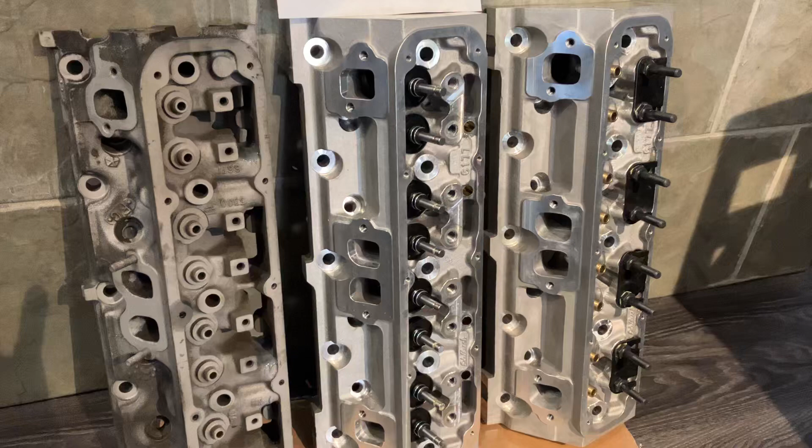All right, let's take a look at some small block Mopar offerings. On the left here, you've got a stock 5.9 Magnum head. In the center, you have an out-of-the-box Edelbrock Magnum head. I've removed the springs and the rocker studs, put some Dykem on it, but I haven't touched it with a grinder, altered the ports or the chambers or anything in any type of way yet.

And then on the right here we have the same head. Those two came together in a pair, and the one on the right is one that I've finished porting, and it's ready to go to the shop and get the valve job touched up, checked out, and then it's going to go on my engine. So we'll look at some hard numbers first. I did some measuring of the cross section of the intake ports, and I took some port opening measurements.

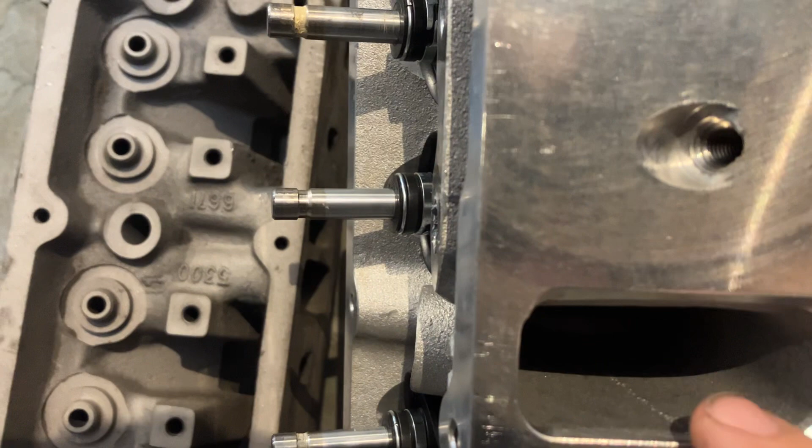So when I say port opening measurements, what I mean is the measurement that they give you here on your intake port on your window doesn't mean that that's going to be your usable area. There's your port opening. Edelbrock's going to give you this number. They're not going to give you the actual cross section, the usable section there in the push rod pinch where your port necks down. So I took measurements both ways. Let's take a look at that for starters. See where we're at here.

Okay, so the OEM is a 1.92 intake, 1.625 exhaust. The Edelbrocks, whether you buy the LA or the Magnum version, are a 2.02, 1.60. That's one thing I want to say here. There is a difference in heads between their LA and their Magnum version. They don't just have one casting that gets machined for different rocker arms. They've actually changed the chambers between the two heads, and that's something I'll touch on with Trick Flow as well. That's somewhat disappointing.

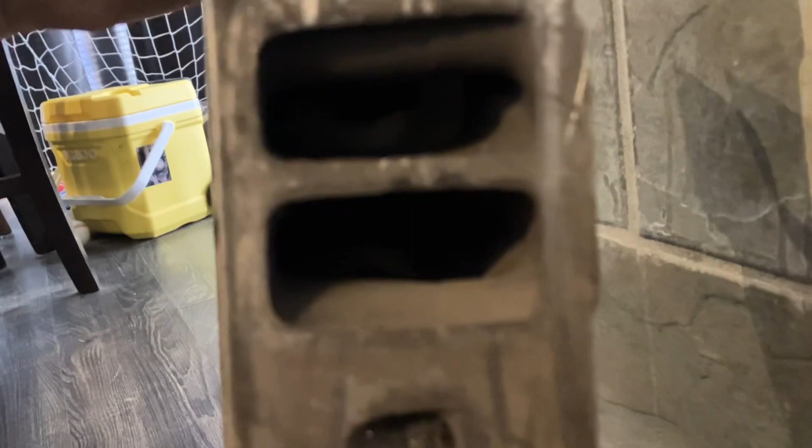So on your intake port on your OEM head, you can see how it shrinks there with that push rod pinch. So on your OEM head, you're 1.071 wide and 2.14 tall. Now that's your gasket measurement at the port. But after the horrible push rod pinch on small block Mopars, your usable measurement is only 0.824 wide. And interestingly, it grows when you get down in the pinch, when you get about a 1/4 inch inside the port.

The OEM head actually opens up. The floor goes down and the roof goes up, and it opens up, which is unusual. That opens up to a 2.271, and your cross section area is 1.87 inches of usable port. Cross section is a measurement of the amount of air you can flow through that area before it becomes a restriction. So what I mean by cross section, I'll touch on that down here.

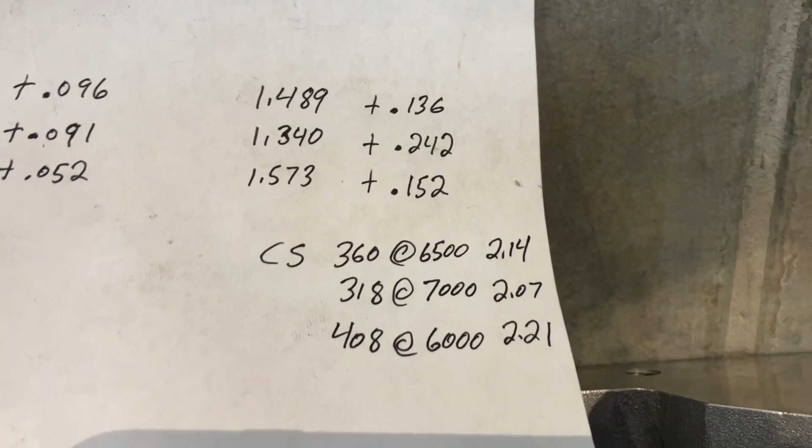Okay, a 360 cubic inch engine at 6,500 RPM needs a minimum of a 2.14 cross section in order for the port to not be a restriction. That doesn't mean that 360 won't spin 7,000, 7,500 RPM, but it means that beyond 6,500 RPM, if you don't have that minimum 2.14 cross section, then that port is going to become a restriction. And there's some numbers there: a 318 at 7,000 is 2.07, and a 408, a stroker small block Mopar, at 6,000 is 2.21. I'm working on a 408, that's why I put those numbers down.

So you look at your 1.87 cross section, and off the top of my head, I don't know, that'll take your 318 to 6,500. These Magnum motors never saw that kind of RPM, so what they designed in the OEM head was fine for the application. Interestingly, the out-of-the-box Edelbrock has a smaller cross-section. It measures a little bit wider at the pinch, but a little bit shorter in height. So out of the box, cross-section wise, it is smaller than an OEM head.

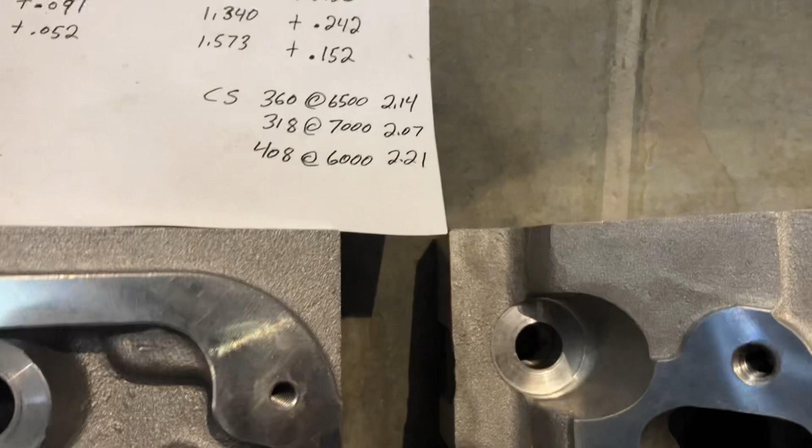And then I ended up with a 2.3 cross-section on my ported Edelbrock when I was done. I ended up at my pinch 1.028 wide and 2.24 tall. So I ended up with a 2.3 cross-section. That's going to support my 408. You know, I'm looking to shift about 6,200, 6,300. So that's going to support my 408.

The way I want you to think on cross-section is on a carburetor, on your typical 350 Chevy with a 650 carb. When you're wide open throttle and you watch your vacuum gauge, your manifold vacuum, you might have 12, 14 inches of vacuum at idle. When you go wide open throttle down the road, that vacuum should drop to near zero. Half of an inch of vacuum.

If your manifold vacuum at wide open throttle going down the road is over 1.5 inches of vacuum, that's telling you you need a bigger carburetor. That's telling you that even wide open, the airflow through that carburetor is insufficient. That's a restriction. That's a choke point. That's the way cross-section works on these intake ports.

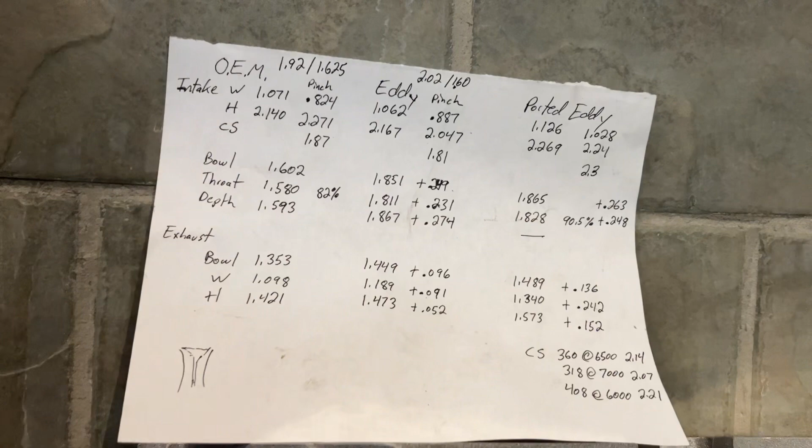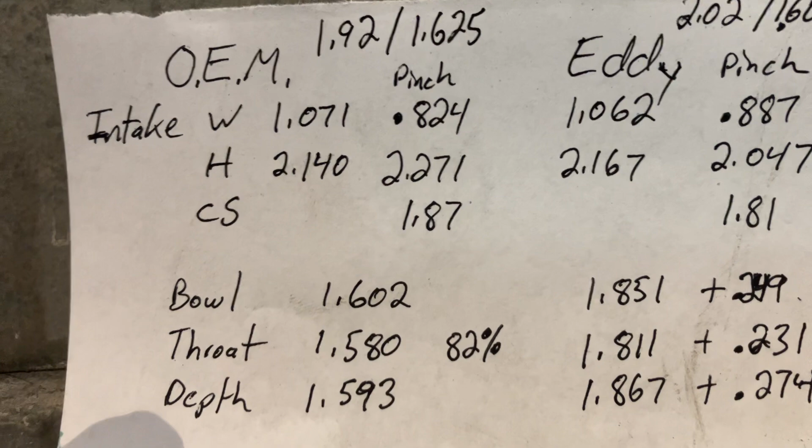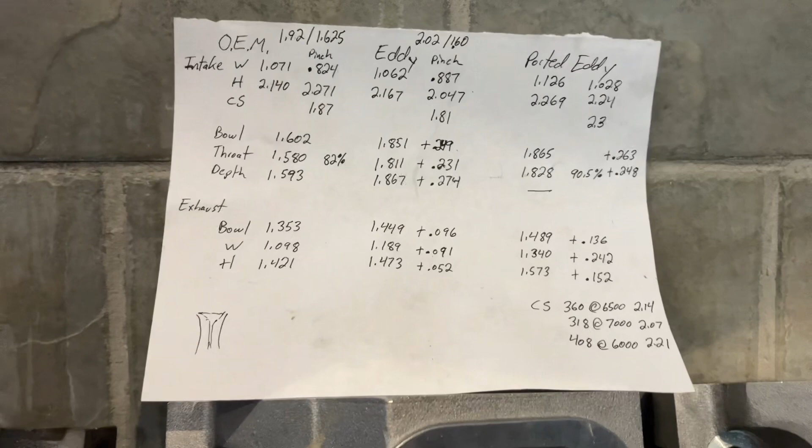It doesn't mean you're not going to spin 6,500 on a 1.87 cross-section on a 408 stroker, but it's going to fall on its face. It's going to be a restriction. So when I talk about cross-section numbers, that's the minimum cross-section you need for that port to not be a restriction. And then you can focus on intake flow, you can focus on the valve, you can focus on those aspects of it and no longer be held back horsepower-wise by your port window size.

So there's the OEM numbers. There's the Eddy numbers. And then there's my ported Eddy numbers. Here's some bowl measurements on the OEM head. Bowl measurements on the Edelbrock head. And you can see here we're almost 1/4 inch bigger there in the bowl. 0.249 increase in the bowl. This is an out-of-the-box Edelbrock head. 0.231 increase in the throat, an out-of-the-box Edelbrock.

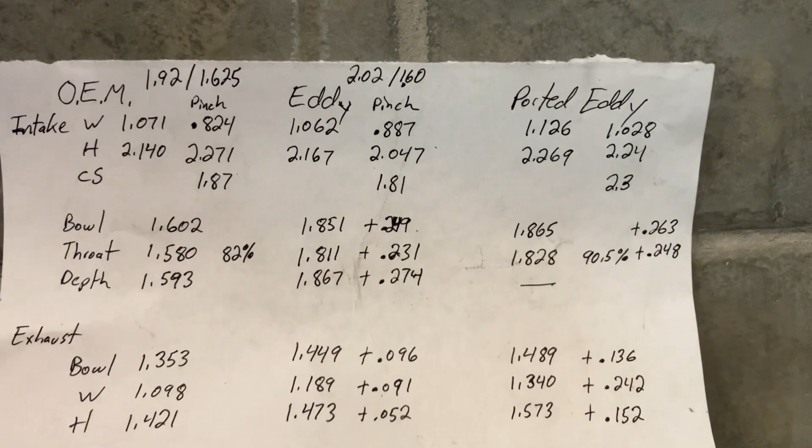And then here's my ported numbers. Now this is from stock. So from stock to ported, I'm in the bowl area, 0.263 bigger, and in the throat, 0.248. Almost a full 1/4 inch bigger in the throat. That's a huge change from stock.

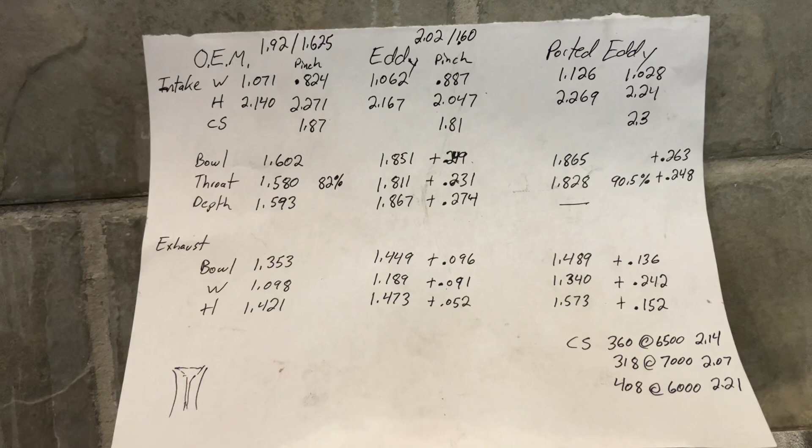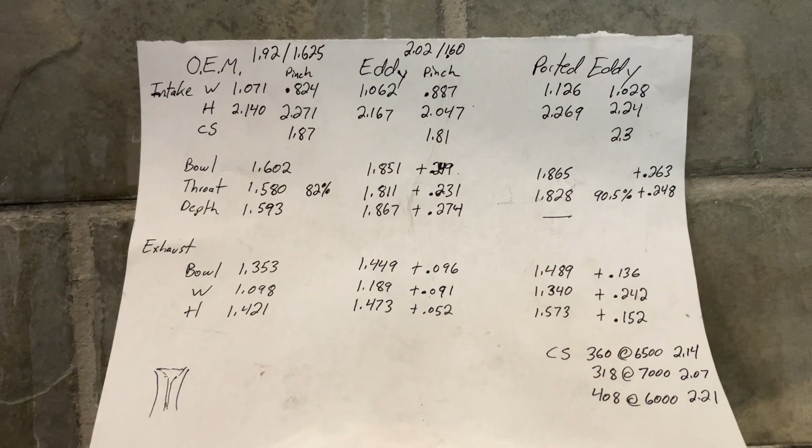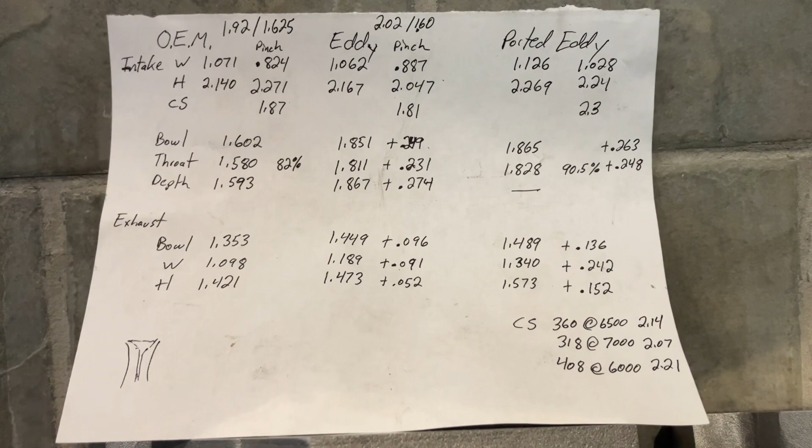There's two main rules that all of you should be focused on when porting your heads. Unless you're the professional guy, you know, with your $1 million shop and you have the right equipment, there's two rules that everyone else should be following. Don't go over 90%, 91% of your intake valve diameter. Should try to keep it 89, 90% of your intake valve diameter on your throat. That's probably one of the most important rules. And that rule exists to keep you from fucking up a head. That rule exists for your safety.

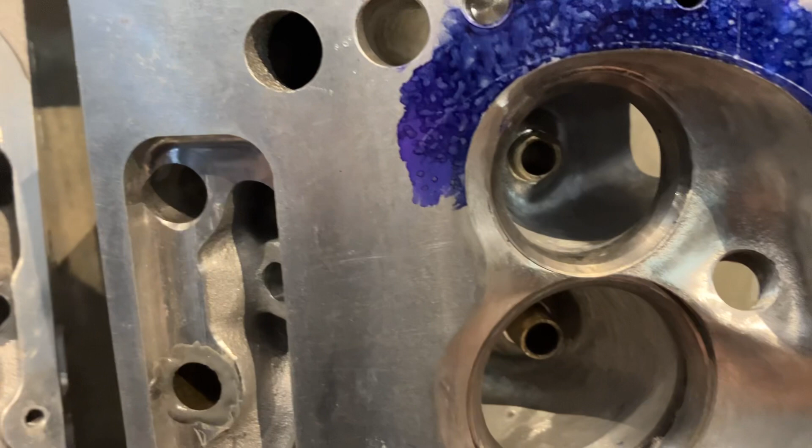So here's your intake valve, your valve job. Now this applies to the intake. This doesn't apply to the exhaust. Here's your multi-angles and your seat. And then this is your throat here. Your smallest point under the valve is your throat. And then you open up into the bowl. So if this is a 202 valve, your throat measurement should never be more than 90%.

I actually ended up, after I came in and finished polishing, at 90.5%. So you should stay 90% or smaller on your measurement here in the throat of your intake valve. That will keep you from fucking up your $2,600 set of heads and hogging this out because bigger is better, and you've killed the performance in them and you've wasted your money. That rule exists for you.

So two rules: don't go over 90% of your intake valve diameter on the throat, and don't fuck with the short side. Don't ever touch the short side. You can polish it, you can clean it up, but do not modify what was built into your short side.

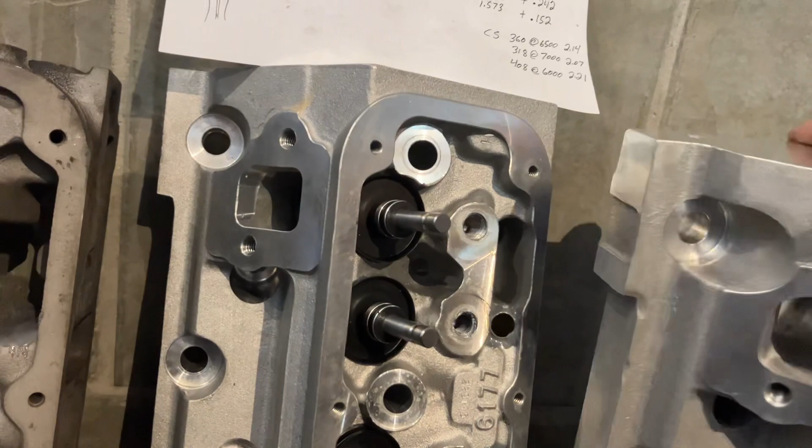This is the first set of heads I modified. I think they're actually going to flow better, but I think I screwed up my engine combination by modifying them. I thought that short side was way too tall. I brought the short side down. I'm sure my flow numbers have gone up, but I think I have also killed my torque numbers. So those two rules are two rules that you should be following.

So on your OEM head here, you can see the throat to valve. This on a 192 valve is 82%. A lot of room for improvement there. Actually, I did measure the unported Edelbrock. And then on the ported one, I ended up, after fully polishing and everything, at 90.5%. That will keep me out of trouble because I don't have a flow bench. I don't have the accurate information to go beyond that 90%.

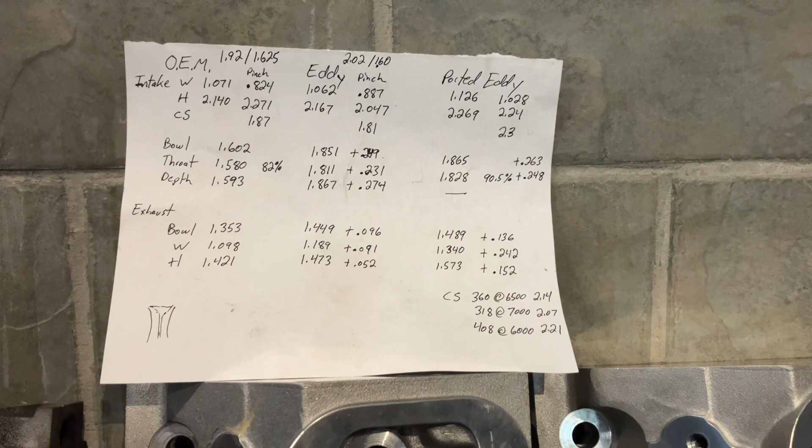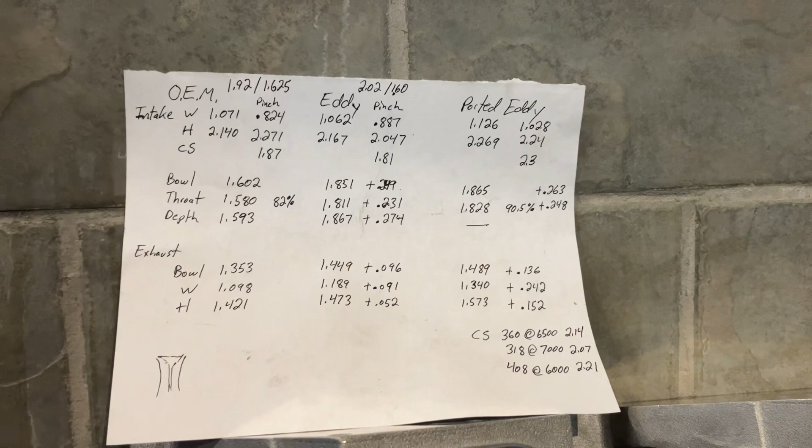The difference between a really good engine and completely screwing up your package is 90% to 94%. That's how small the window is. So don't think, well, you know, he said 90% and I'm 91.5, a percent doesn't make a difference. It does make a difference. The difference between a hot street engine, race engine, a guy that ported his to 90%, and one that's completely screwed up is only 93, 94%.

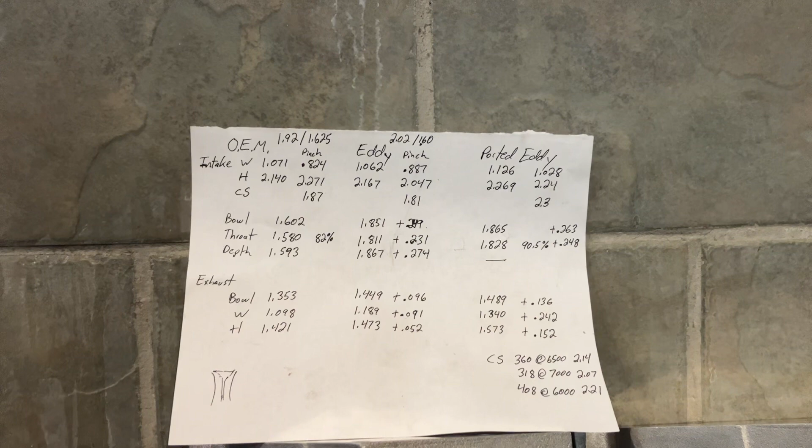Even the pro guys won't go beyond that, and most of the time they don't touch 93, 94% unless it's for a very specific combination and they've done a lot of research. So the window is very small. Don't take that 90% and think 91% is okay. It's not.

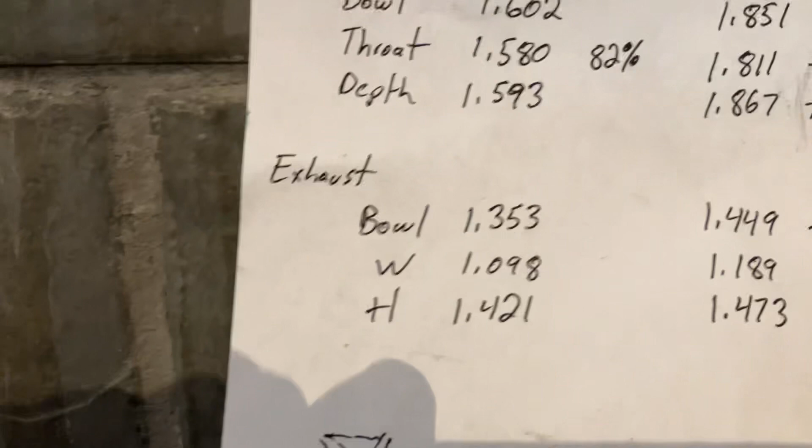Here's your measurements on the exhaust. This is the OEM head. There's your bowl. Now your width and your height there is the measurement on the port window, which is horrible on an OEM head. I know these Magnums flow. I'm not saying they don't. If you go from an LA head to a Magnum head on your LA block, you have absolutely made the right move. It's a far better improvement even than the 340X heads and the U heads and the J heads. A mildly worked Magnum head is going to be every bit as good as those heads, if not better.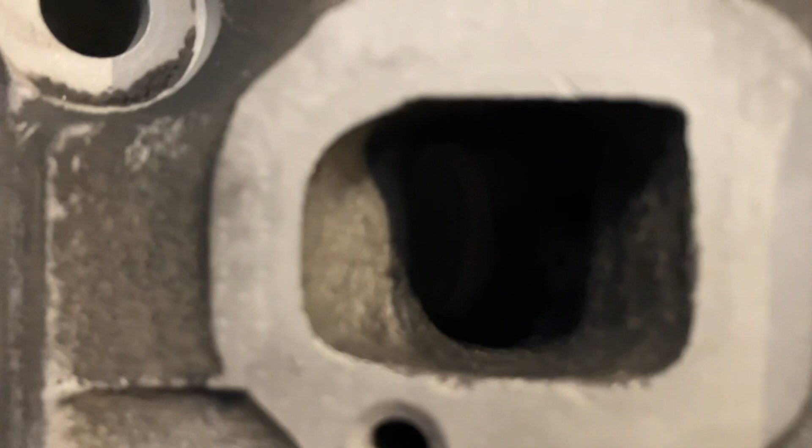However, looking at it, you can see such a big port opening and such a big window, and then you can see how bad it necks down and how small your window really is.

There's an out-of-the-box Edelbrock, quite a bit better than your OEM, noticeably better than your OEM. Here you've got a lot of floor, and I think this is a water passage here that necks down your port, and they've corrected that in the Edelbrock. And then here's a ported Edelbrock. Huge amount of change, just an absolute huge amount of change.

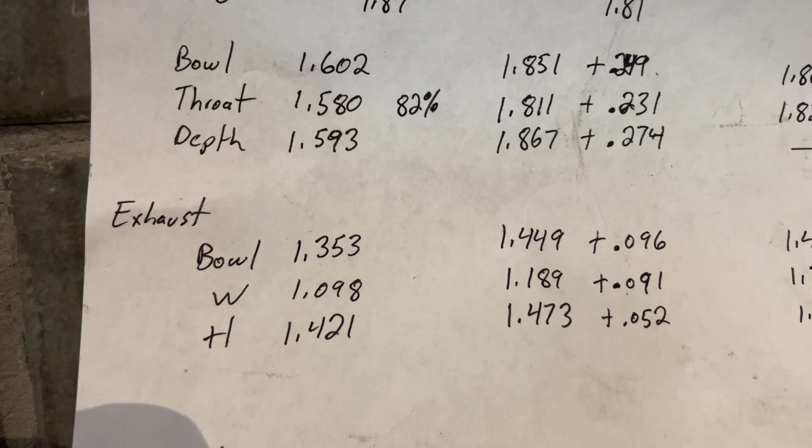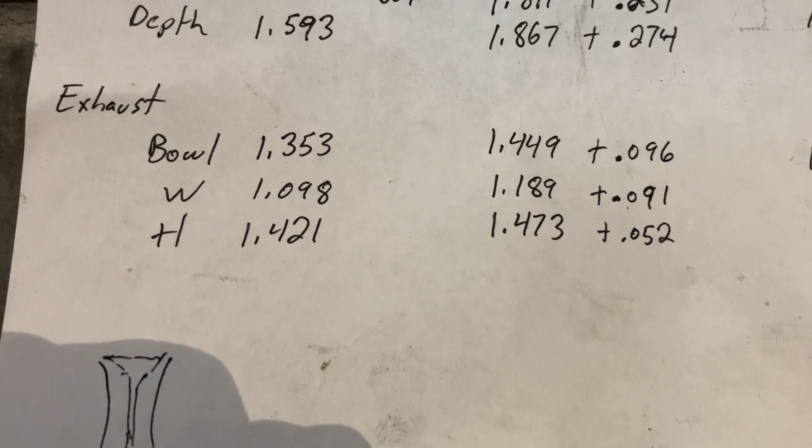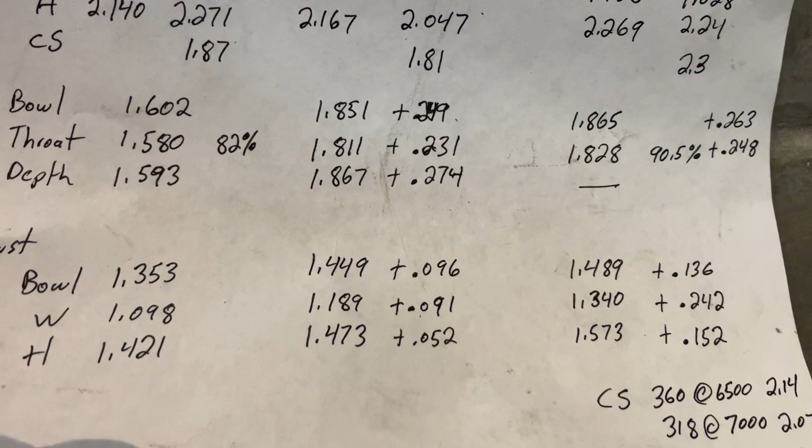So here's your Edelbrock out of the box. Your measurements there, you can see you're almost 1/10 of an inch bigger in the bowl. And then your width and height on your exit port is almost 1/10 of an inch on width and 52 thousandths on height. And that's a ported Edelbrock. So I ended up almost 1/4 inch wider, 150 thousandths taller on height, and 136 thousandths bigger in the bowl.

What else can we talk about on these heads? Let's talk about chamber, and let's talk about why I didn't like the Edelbrocks until I bought them, and the things that I do like about them. And this is a question for you guys because this is the only set of small block Mopar Edelbrock heads I bought. These are the 5.2, 5.9 Magnum version of the head.

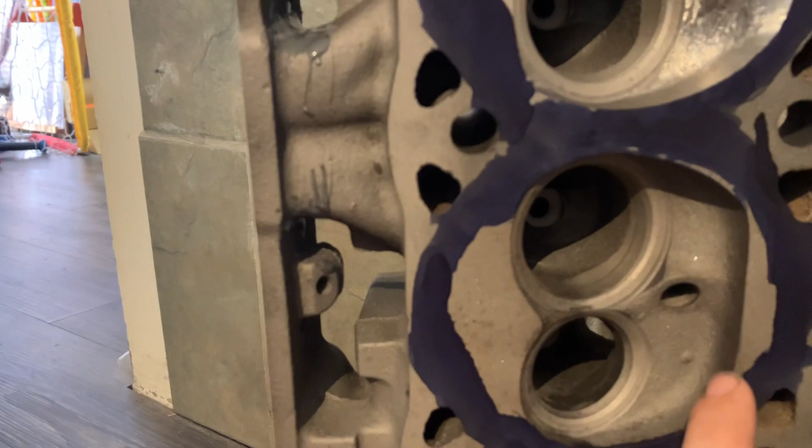If you look at an OEM chamber here, you've got the quench pad, you've got the heart-shaped design, but then they're flat over here on this part of the chamber. And as your intake path comes out here, it is, again, better than an LA head, but you still have this wall and you have another quench pad. Part of the reason for that is Mopar wasn't making you a race head. They weren't making you a hot rod head. They were making an OEM head for millions of cars and trucks on the road. They had emissions requirements that they needed to meet.

And so you've got another quench pad over here. Remember, they weren't trying to make you a hot rod head, a race head. They were making an OEM head for production. Now you jump over to the Edelbrock Magnum head, and I'm going to keep saying Magnum head because this is completely different here. This is a lot more like what you're going to see in a Brodix, high-end small block Chevy stuff, AFR stuff, really good flowing heads.

This is going to help promote swirl in your chamber. It's going to help bring the intake in, and you can already see here it's going to allow it to draw all the way into the cylinder wall, and it's going to help promote swirl in the chamber. That's something that you don't have in the OEM design. And here's the thing that I'm getting at.

I believe, correct me if I'm wrong in the comments, but I believe Edelbrock's LA version of this head does not have that chamber. Everything I see tells me that Edelbrock copied the OEM chamber in their aluminum LA head and not on the Magnum head. I also believe that to be true for Trick Flows. I haven't owned the Trick Flows yet, but everything I'm seeing shows me that the Trick Flows copied the same OEM chamber design. They didn't do anything to improve it there. They've got better ports, better flow, better valve jobs, a lot of stuff better, but I believe both Edelbrock LA and Trick Flow copied that chamber and did nothing to improve that.

That's what really turns me on about these Edelbrock Magnum heads, and that's why I think if I were building another one, even if I was building an LA engine, I would still buy the Magnum head for the better chamber design, and I would bolt that onto my LA engine, whether I re-drill the intake for the LA valve, the bolt angle, whether I change that on the head or modify the intake or whatever. I would use this head even if I was building an LA engine.

so look at our pinch on our OEM head, 0.824, 0.887 out of the box on the Eddy, and I took that 887 all the way out to a 1.028. Huge improvement on pinch, huge improvement on probably the biggest restriction in these heads, which is going to be that push rod pinch, which is why if you look at race stuff, W2 stuff, TA stuff, other stuff, the first thing they do is they move this push rod over.

They move the whole tunnel over out of the intake port, and that's where they pick up their flow in a lot of the factory aftermarket race stuff, probably some of the Indy offerings. Then you get into needing an offset rocker arm, but that's the first thing they do. So if I can take that out to the absolute max by putting in those tubes, then I think that's a huge improvement on these heads. That's something Edelbrock offers. Now let's go back to our OEM head.

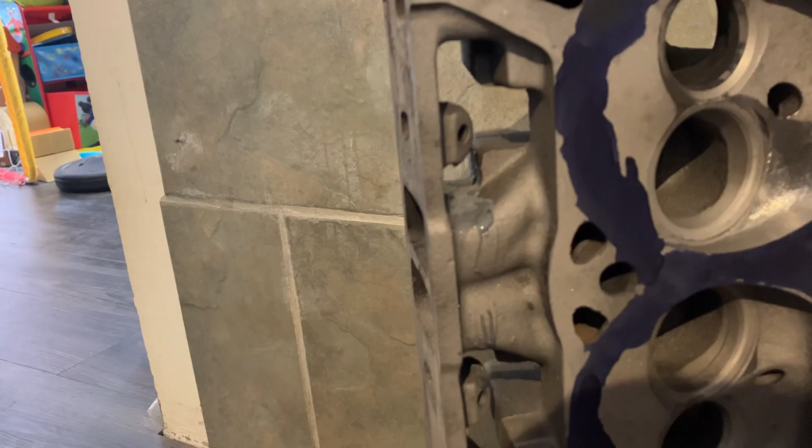Okay, our OEM head is an open design. We don't have push rod tunnels, and we can't do that. If we break through that wall here, if we break through that push rod pinch, then you've broken through into your engine, you've screwed up your head. So the one thing that I did yesterday when I was putting some tubes into this head, I haven't ported it or anything yet, but I was installing the tubes. I put some epoxy here and I'm going to build up a couple of layers of epoxy there. Now I can't get too thick because my push rod's got to ride inside here. The reason I built up the epoxy was just purely as a backing.

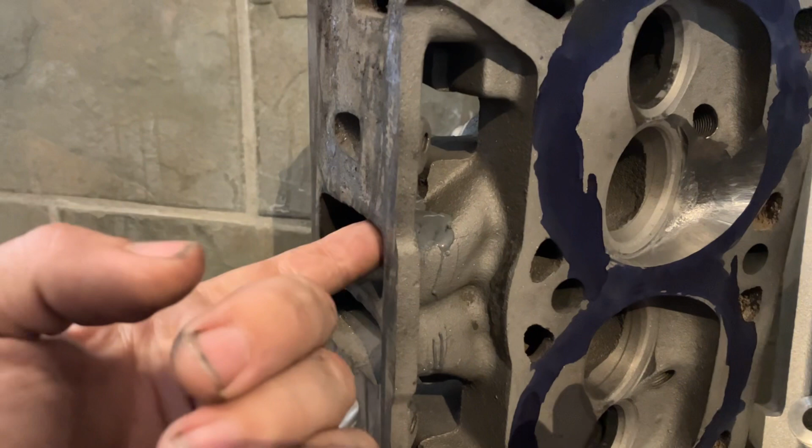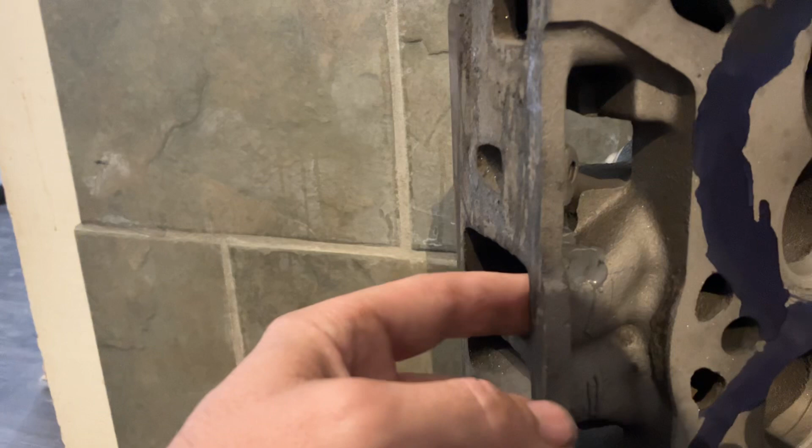So what I'm going to do is I'm going to port my push rod pinch with my carbide bit, and as the wall gets very thin, I'm going to start to see discoloration. I'm going to start to see hot spots from the carbide bit on the wall. That's where I'll stop. I'll take it out real thin until I get some hot spots, and the epoxy is just going to serve as a backing to add some strength to that area that I know I'm going to make thin. I can't do as good a job as I could on the push rod tubes with the Edelbrocks, but that's still going to allow me to open up this cross section, which is your biggest restriction on these heads. It's going to allow me to open that up as far as I possibly can.

I believe TrickFlow is the same thing. I believe they have the open design. So again, let me know in the comments, but I think they copied this design, which was a poor move on TrickFlow's part. I like TrickFlow. I have several sets of TrickFlow here in their big block offerings. I think they're probably the best bang for the buck head on the market. Even for you small block Mopar guys, if you're just buying something out of the box and you're bolting it on, you don't want to put any extra money or effort into it, I think the TrickFlow is a great improvement and the way to go.

For anyone that's looking to put in more effort, looking to get more out of their engine, I'm disappointed in some of the choices that TrickFlow made in the small block Mopar offering. And I think this Edelbrock really shines here. And this is something you'll also see if you get into their old Victor heads. You'll see that in the Victor head as well.

So then that got me curious, and you can see here, I thought, well, how much meat is there in there? I was kind of looking through the water jacket. Can I take this OEM head and can I try to mimic the swirl that's built in to this Edelbrock chamber? And I think I'm going to be successful at it. Here you can see where I've taken quite a bit out of this wall here. There was enough material for me to do that. And I'm going to try to get this chamber to work like the Edelbrock. I'm going to try to promote swirl here into my cylinder.

That's another thing that I'm not going to get into on this video, talking about swirl, quench, talking about your air fuel. That needs to be a separate video, but that's the reason for this modification here, and I think that may offer a huge improvement on these OEM heads. So I'll leave it at that.